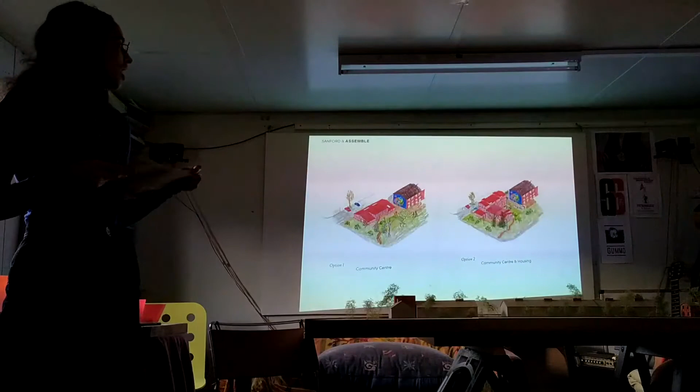This is Assemble on the right. So this is an image of the wider collective. There are about 60 of us at the moment on one of the structures that we designed 2 years ago. And so we proposed 2 options: one for just the community centre and one for the community centre and housing, in response to the brief and areas outlined in that document that you gave us.

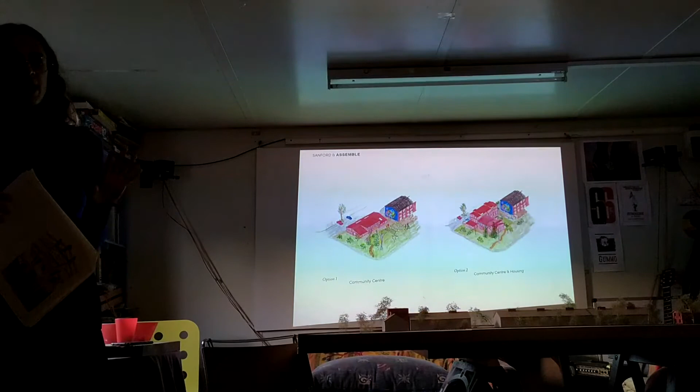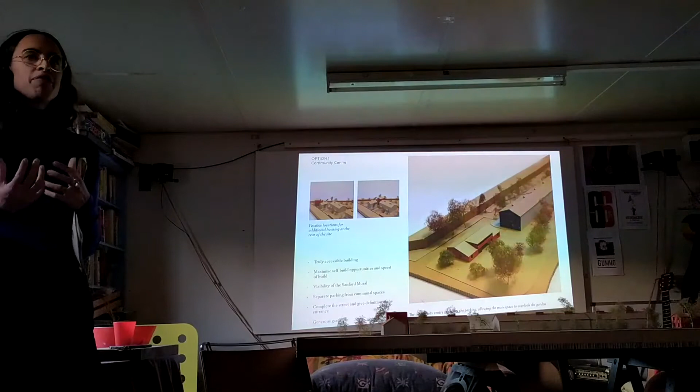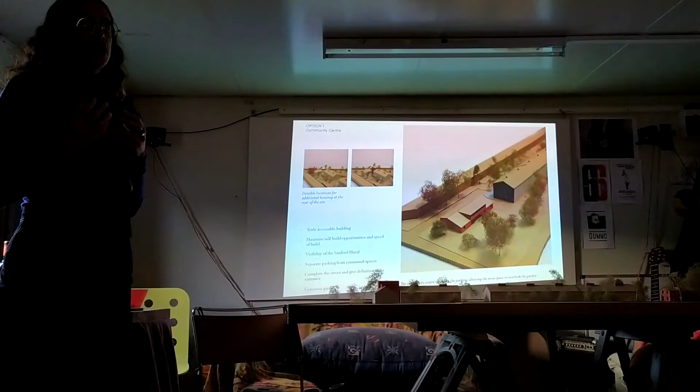And so really we used the opportunity to test that brief and test certain parameters around it, such as it being an accessible building, trying to think through potential for self-build construction, and how we might also think about where the location of this building might be, and whether it's here, where the containers currently are, or somewhere else. So in this example, we were really thinking about the entrance to the site and creating a clear street line through to the other housing in Sanford.

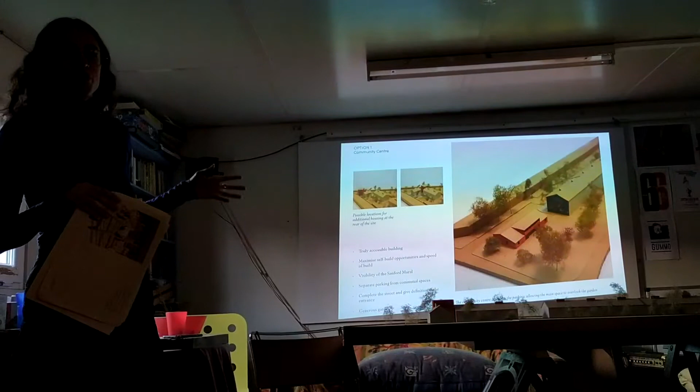We also have been thinking about the idea that the community centre would be on this location, but that wouldn't preclude housing being also part of this proposal, and potentially sites towards the back of the site being used to develop a scheme. We felt that potentially the restrictions around those areas might be too difficult for us to work with at a competition stage. So in a way, we're presenting to you 2 community centre and housing schemes rather than one. Al, do you have anything to add to that one?

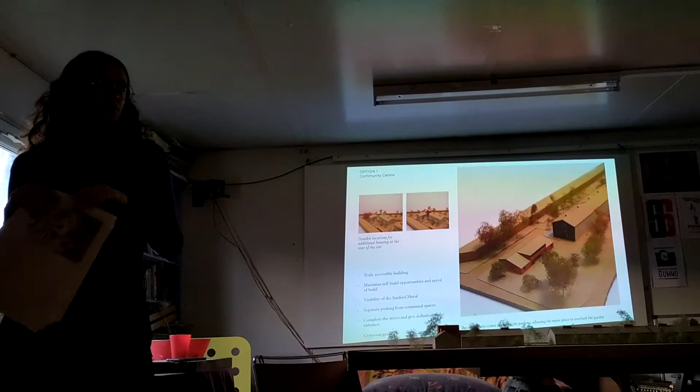But I guess also with both the schemes, we're quite interested in how the new public front that might be created for Sanford, and how to address the high street and the boundary, but also questioning whether to separate off the car parking from the public from the garden space. But yeah, with both of them we were interested in creating these new pocket gardens across the site. Yeah. So go to the next slide.

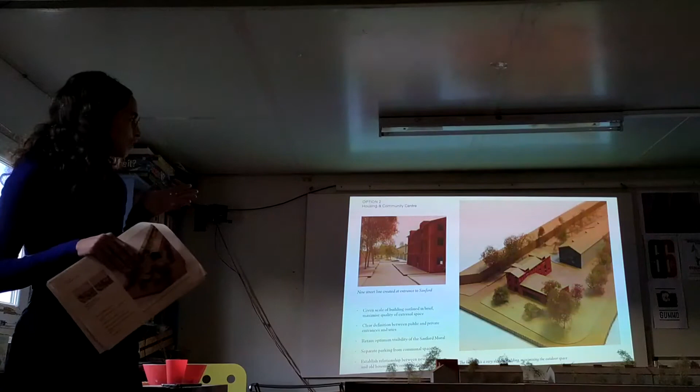So that was really the driving factor for this scheme, and you can see the image on the left. This idea that there's a really clear entrance where the car parking is retained in that same location, that there's a street front, there's a front door for the housing, but then this allows the part of the site directly in front of the mural to be an extension of the gardens that are running along the back, with the community centre positioned in a way that gives a view through this big open front into Sanford. So also in both schemes, trying to retain a clear view of the mural from the approach on the east side of the site.

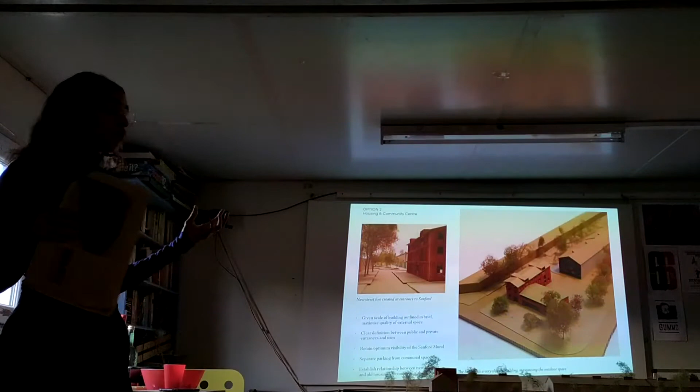And we proposed a very slender building, or as slender as possible, for the housing in order to maximise the outdoor space, but also combining these 2 buildings, the community centre with the housing, rather than trying to fit 2 separate structures on the site. This allows them also to share the services, and allows more flexibility in terms of movement between the buildings and their future uses. Again, with this proposal as well, you could additionally develop those back areas of the site for even more housing, allowing then this building to become entirely for communal use. But that's a very long-term ambitious idea that we wanted to think through.

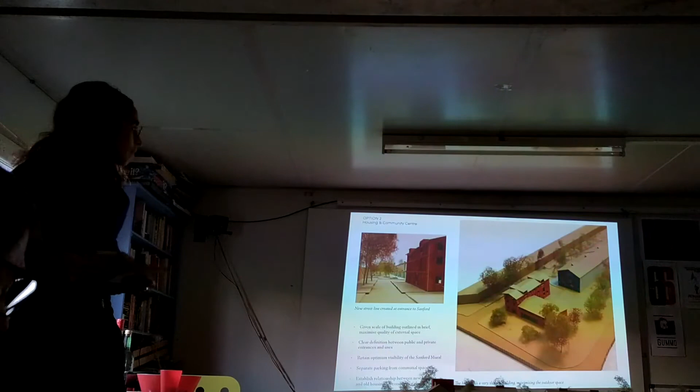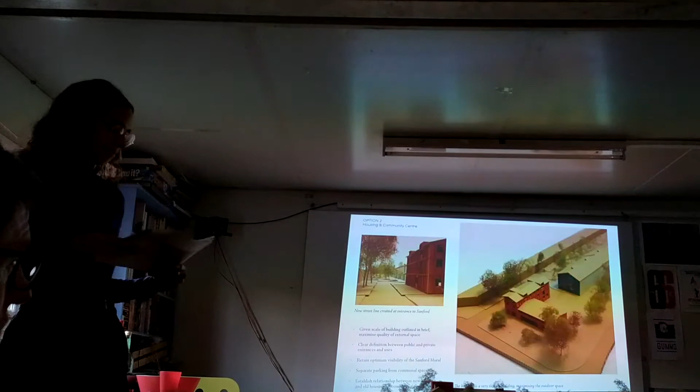I guess also just that you'll see in the plans on the boards, which we've got as an appendix at the end of the presentation if you want to go over them, that the community hall is located in the middle of the plan to frame the mural from the street, so to make the view through to the mural as public as we can.

And so really the approach is a response to the scale of spaces outlined in the brief, and really trying to think about what the quality of these spaces might feel like. So kind of formally and in terms of location and the scale of the building, with our approach, there's quite a lot up for grabs in terms of positioning and size.

And so what we really wanted to focus on for this presentation is the materiality, which we think is a really exciting part of the scheme, not only in terms of creating a really interesting building, but something that also creates a series of opportunities for people at Sanford to get involved with in terms of fabricating the building itself. So it's a solid timber frame structure, potentially using some sort of hempcrete to create the wall build-up, and then clad with timber panels.

We've got a 1 to 10 mock-up that we made here, but we can talk through that a little bit at another point in the presentation. So I'm just going to hand over.

But also, this is our first response, because we also haven't had a chance to really talk to all of you very much about what you'd really like to have in the community centre, what the necessary spaces are, and where the housing is located. We've run through our first thoughts, but it'd be great to develop it with you further on. The part we have developed more is the construction method.

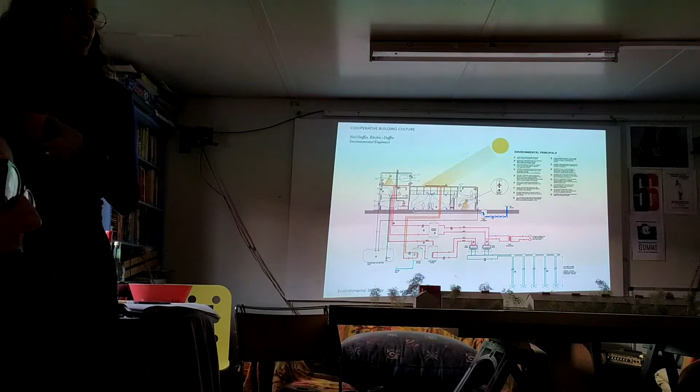So Neil, over to you. Do you want to come over there?

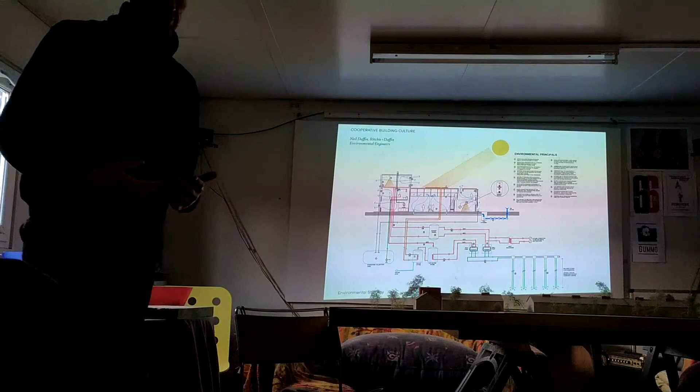So I guess we want to work with you to help create very comfortable and delightful spaces that really limit the use of energy in the building and the carbon emissions. And here's an environmental diagram that we've put together. There's quite a lot going on here, but we think that the new building should be heated using heat pumps, either ground source or air source. Ground source is more efficient, but a bit more expensive. We've shown a possible connection to the SELCHP if it ever materialises. That would be great if that happens.

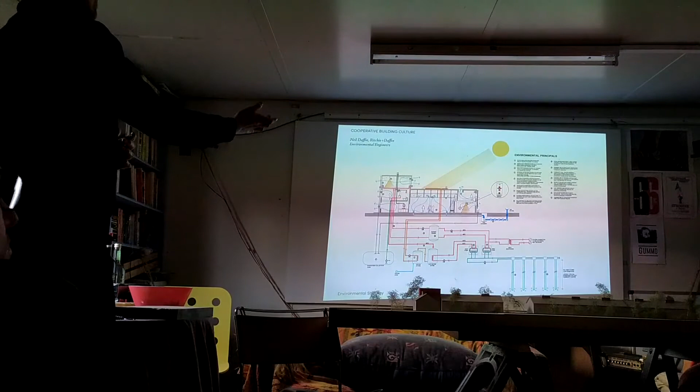And then we can use solar water heating to preheat hot water for the bathrooms in the housing. We can recycle water from the roof to flush toilets. So we can use all these low-tech, low-energy systems in the building. But the real focus for us is on the building envelope, because that's where you can make the biggest difference in lowering your energy and carbon emissions, because the building envelope is managing the flows of heat and light and air across the boundary. So if we can make the building envelope work a lot harder, we need less of this stuff, and it needs to run less often.

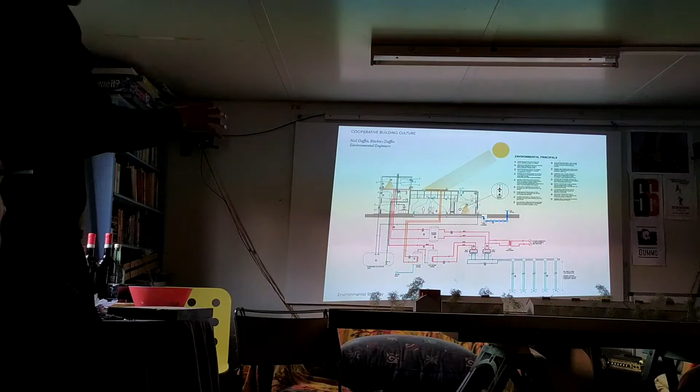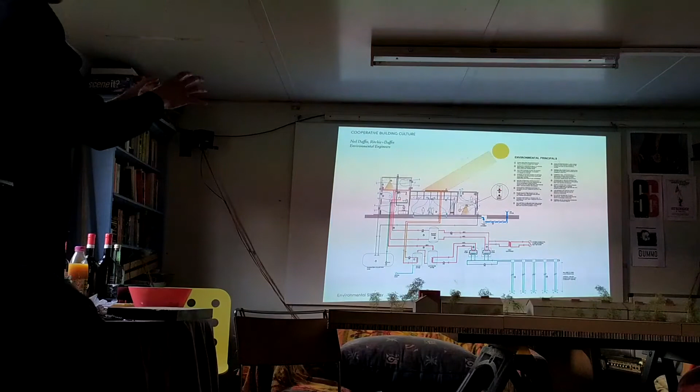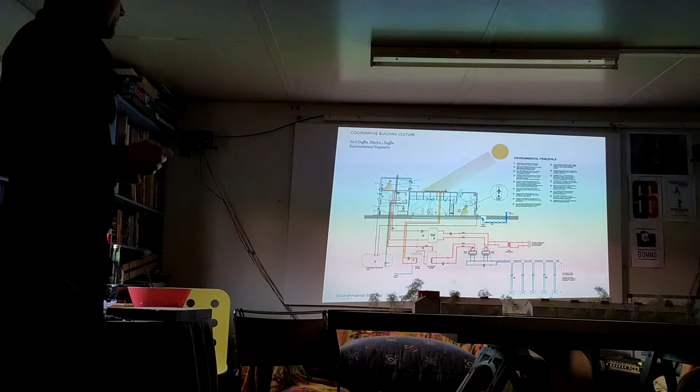So it's about looking back in the past: buildings that were constructed before the introduction of electricity worked really well, in that the architecture was developed around maximising natural light and daylight. So it may not come across in this plan, but what we're really trying to do with these buildings is make them all highly daylit, much more daylit than, say, this space. Maybe light coming from two directions, so you create an air path for air to flow through. So it's all working naturally. And then maybe we go to the next slide.

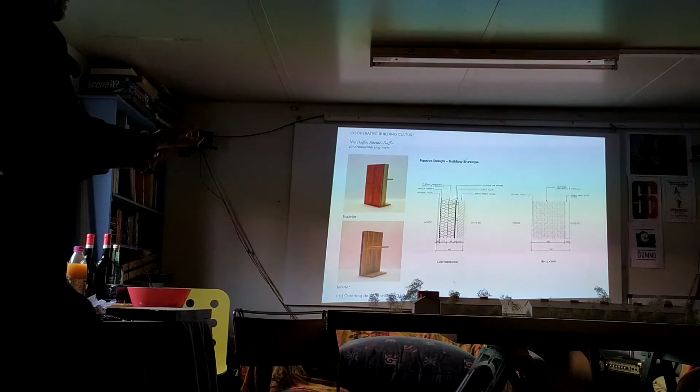What's really important is the actual material that we construct the building from. And as Jane said, we're proposing hempcrete here, which is a natural material of hemp and lime binder mixed together, and works really well. It's a good insulant, but it's also got a very high density and specific heat capacity. So compared to traditional conventional insulation material, it's got a lot of thermal mass. What that means is that its response to the outside environment is slowed down. So in the summer, essentially, it acts a bit more like a cave, and there's a bigger delay in terms of the risk of overheating.

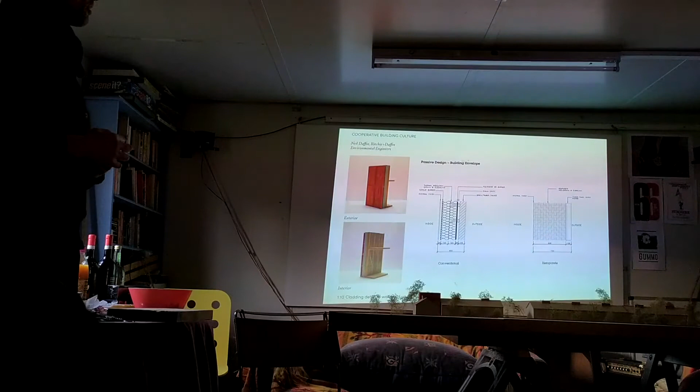And the other great thing about hempcrete is it's vapour permeable. With a conventional wall build-up, we have lots of layers, breather membranes, vapour barriers, air gaps, to make it all work and make vapour flow through without forming condensation in the middle. With hempcrete, you can just put it down and it will work naturally on its own. The disadvantage of the conventional build-up is that you add all these layers at different stages on a building site, and so there's a greater risk of things failing and the thermal performance not being quite as you want it to be.

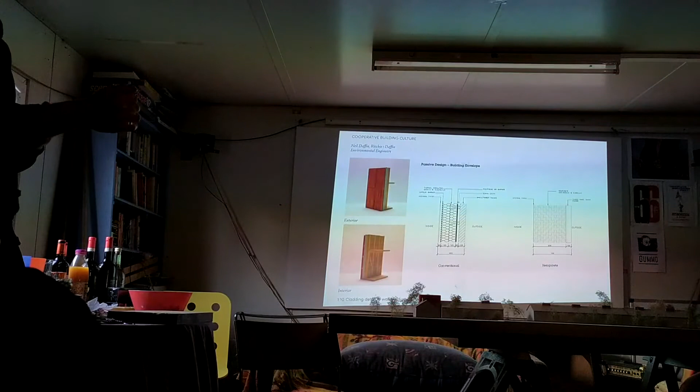So we're proposing hempcrete. It's a really great material in terms of building performance, but it does need to be slightly thicker than the conventional. So we think somewhere between 600. We could probably get away with 400, but 600 will give you the optimum to get really good thermal performance. Pete, do you want to say something about how it stands up?

Yeah, so from a structures point of view, we haven't really developed the structure of the proposal because there's an understanding that it's just that, a proposal, and to a certain extent it's a fluid design that will be developed in response to your needs. We've just shown a couple of the buildings that we've done in South London in the last few years that sort of demonstrate what can be done at low cost using natural materials.

For this project, timber seems to almost be self-selecting, for its low embodied energy, its carbon sequestering, and something that we're increasingly interested in, and I think could be applied to this project, is the notion of provenance of materials and delaminating materials. So, for example, if you were to build it out of solid timber, knowing where that timber comes from, even to the point of perhaps selecting a standing Douglas fir in the southern counties and saying, let's build our building from this, having a direct relationship to the materials that you're using. That's more and more important to us, I think.

The next slide speaks of, as engineers, Structure Workshop, we're really interested in the clear expression of structure and materials, and we feel that robust detailing in a timber building is really important to protect it from weather, the plinth, the overhangs, to make the building durable, but also focusing on, say, the connection design to contribute to the beauty of the building and the quality and the tactile quality of the building. We really believe that input from the structural engineer can contribute to the architecture.

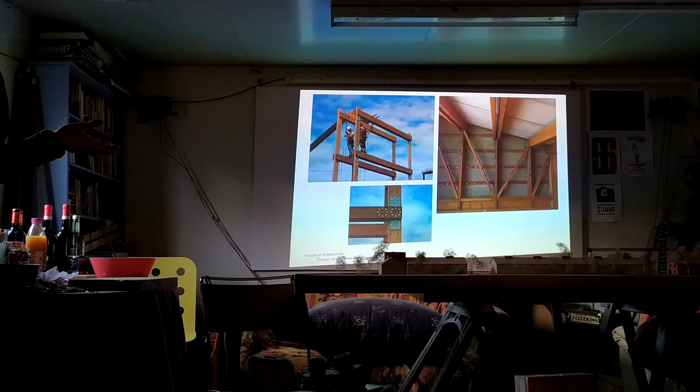And just to follow on from the self-build aspects of it, that's something that we as Assemble are really interested in and have quite a lot of experience in working on. About how much of it we build with you, as Pete was saying, whether it's from the structure through to the cladding. So we've designed something that could all be entirely self-build. We have quite a lot of experience of working on a self-build cladding system.